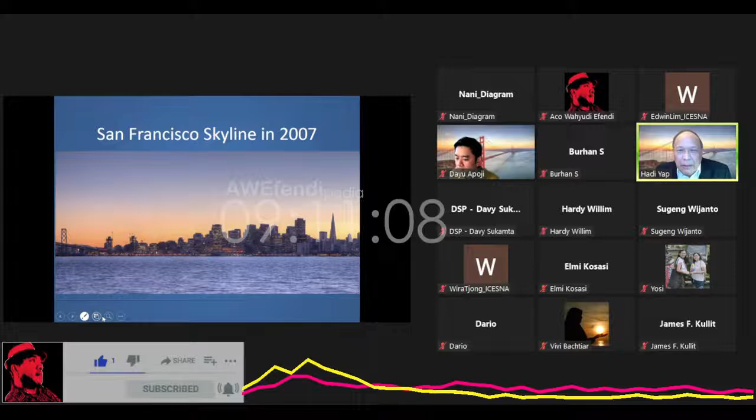Okay, during the past 2 decades or so, we see the skyline of San Francisco has been changing. This is the skyline that we saw in 2007. Fast forward to 2021, you can see there are so many more high-rise buildings in San Francisco. Most of these buildings are on the south side of the Market Street, which divides the San Francisco downtown into two.

The companies that I've been affiliated with, namely Treadwell and Rollo and lately Langan Engineering, were blessed with the trust of our developer clients. They have been the geotechnical engineers for most of these buildings. So because of that, I've been practically involved in practically all of these deep excavation projects in San Francisco.

So in this webinar, we will talk about 4 different systems. One is soldier piles and lagging. The second one is soil nailing. The third one is soil cement mixed walls, or deep soil mixing, DSM. And the last one is concrete diaphragm walls.

The general design considerations that govern the design of the shoring system include looking at the base stability for clay, bottom heave for sand, looking at the structural consideration, failure conditions, and construction-induced ground motion.

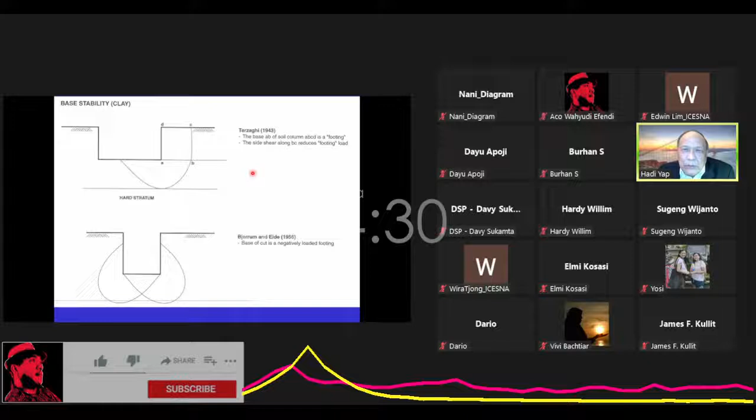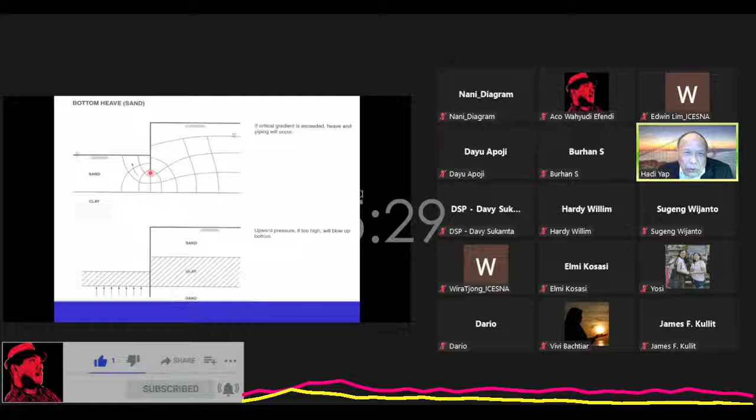When we have sand and there is a groundwater table, and you make an excavation here, you will see that there will be seepage coming toward the ground, coming toward the excavation. So you can draw a seepage diagram that looks like this. And because of the difference in water table, or difference in water pressure head, there is a tendency for this column of soil here, immediately adjacent to the excavation, to kind of want to move upward.

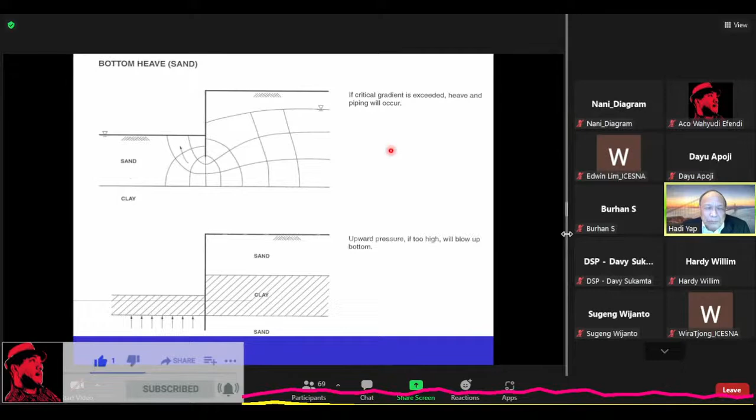So that happens when the confining stress, effective confining stress within this soil column, becomes zero. So this column of soil becomes unstable, and that is a phenomenon that we sometimes call boiling or piping. So boiling and piping is practically a kind of static liquefaction, because liquefaction is also a case where you have your effective stress in the soil equal to zero.

Now look at the other situation where you have a clay layer like this. Seepage cannot occur readily because of the impervious nature of the clay. But beneath this clay layer within the excavation, you have an upward pressure that wants to uplift this layer of clay. So for that situation, we need to reduce the pressure beneath this layer so that it will not cause upheave or bottom heave condition in the sand layer.

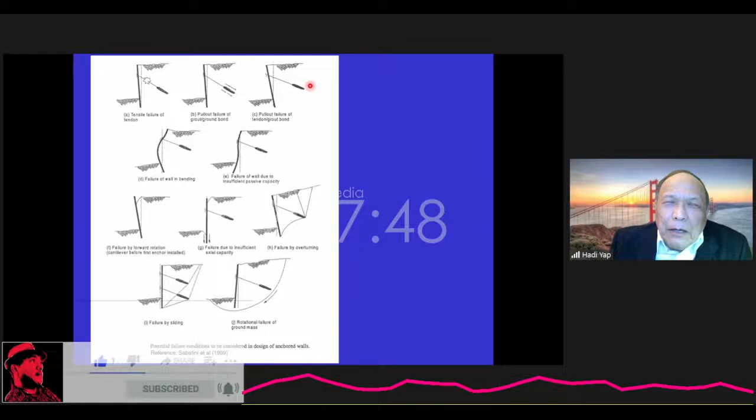This case here is where your skin friction between the grout and the soil is not adequate to resist the tieback pressure, so your wall can also move outward. This is a situation where the skin friction between your tendon and the grout is exceeded by the outward force on the shoring wall, so you also have a kind of slippage condition here.

This situation is where your shoring wall is not strong enough, so you have an excessive bending condition. This situation is where your embedment into the ground is not deep enough, so you have a kind of passive failure here.

This is the initial stage of your excavation where you have not installed your tiebacks yet, so it may cause failure by rotation.

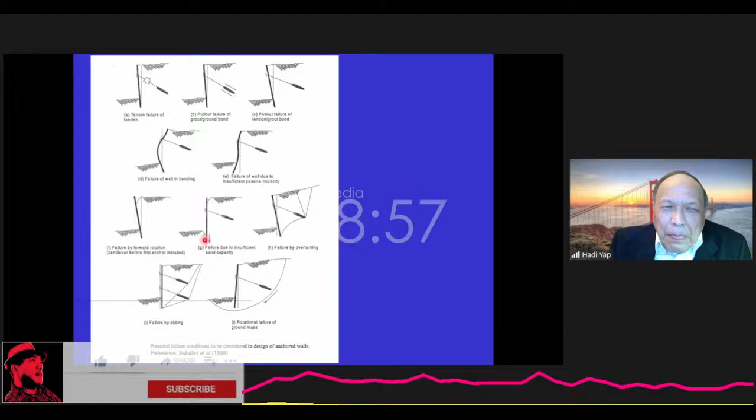This is the situation where your embedment is not deep enough. Remember that this tieback is normally installed at an angle of 15 to 20 degrees, so there is a vertical component of the tieback force that needs to be resisted by this embedment, the skin friction of the embedded portion, and the soil around it. To remedy this situation, you need to deepen the embedment depth.

This is the situation where the bond section of the tieback is not far enough. You might have this kind of overturning, like a block failure, but overturning kind of a thing.

This case is similar to this and also similar to this. This is called a rotational failure, a mass stability problem.

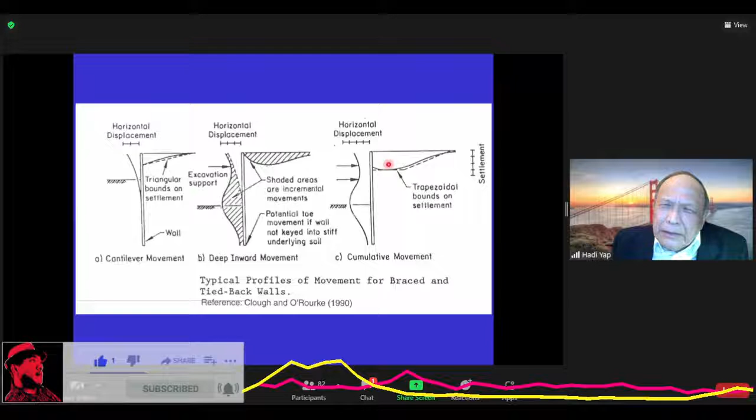This deflection is roughly equal to that settlement. According to the statistics, this is about 75% of that value. So the average ground settlement outside the excavation is about 0.15% of the excavation height. For a 20-meter excavation, the ground settlement outside, if you do a good job designing and constructing the wall, may be around 3 centimeters.

3 centimeters is about 1.25 inches, something like that. The reason this is important is that you might have adjacent buildings that are maybe old, maybe brick, maybe unreinforced, outside your excavation, and they are sensitive to differential settlement. So you want to try to maintain the ground settlement outside your excavation as small as possible to reduce the potential for damage to that old building.

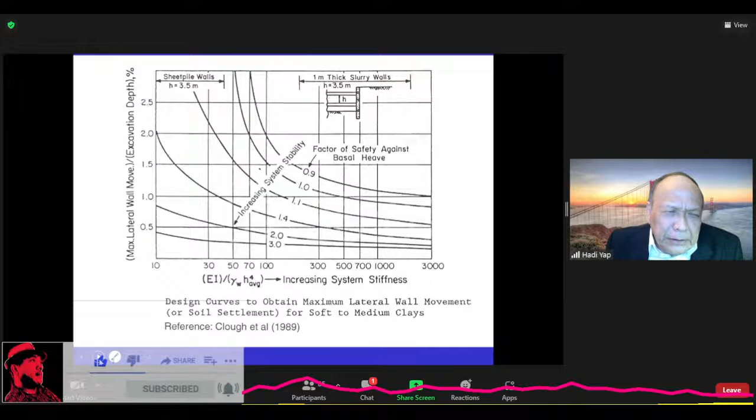Now let's look at other factors that may need to be considered in design of shoring systems in the San Francisco Bay Area. Actually, this isn't just San Francisco - I think everywhere, Indonesia or elsewhere, the same problems may apply to deep excavation because some are common to all. For example, you have adjacent old buildings, some with basements - that's something you need to consider in your shoring system design.

You may have random fill on your site. What's the problem with random fill? The problem is that it may not give you adequate skin friction for your tiebacks, for example. High groundwater level is an issue you have to deal with, because you don't want a problem with piping, boiling, or basal heave in your excavation, as we've talked about earlier. You may have a soft clay problem - soft clay causes base instability.

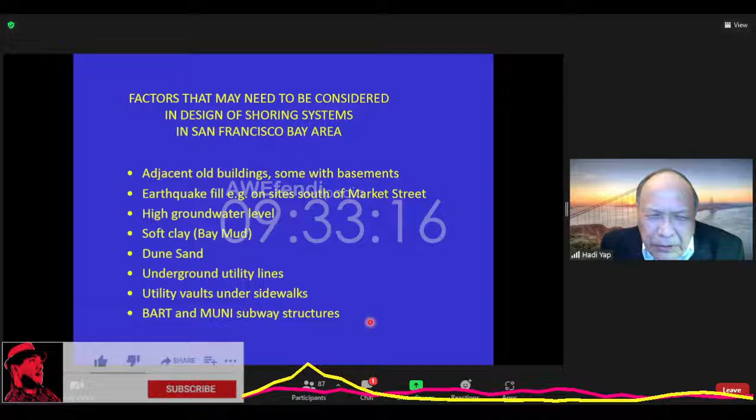You may have utility vaults under your sidewalk, electrical vaults or something else you have to be mindful of. And in another case, you may have subway structures. We have BART, the San Francisco Bay Area Rapid Transit System, similar to MTR or MRT in Indonesia, Singapore, and Hong Kong. We have to make sure our shoring design does not impact this subway structure.

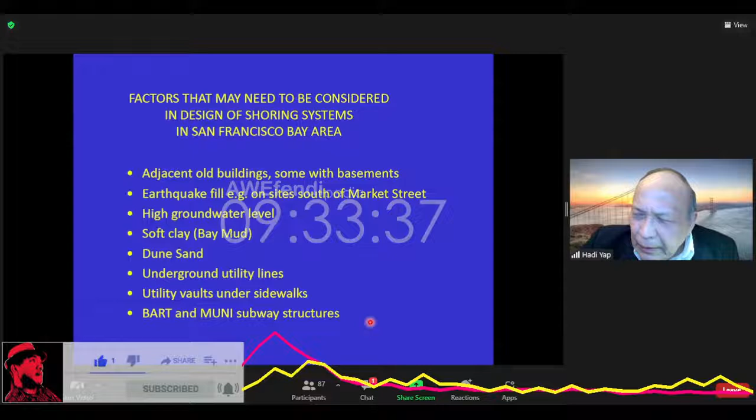Let me show you a map here. This is Market Street in San Francisco. There is a subway structure underneath Market Street, one for Muni. This is the cross section, AA. These two tunnels belong to Muni, the municipal electric train system that, in the rest of the city, runs at street level, but within Market Street goes below street level, on top of the BART tunnels.

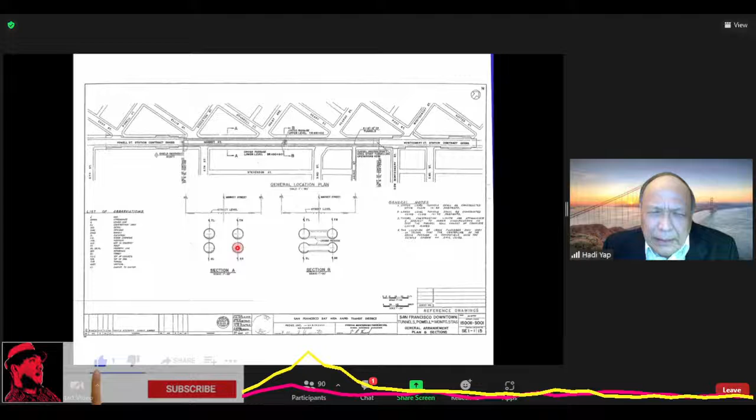BART is the Bay Area Rapid Transit System, similar to MTR and MRT, connecting cities like San Francisco, East Bay including Oakland, Pittsburg, Concord, Walnut Creek, and South Bay, including South San Francisco and the Millbrae station. So once in a while you have this connecting tube between these two tunnels.

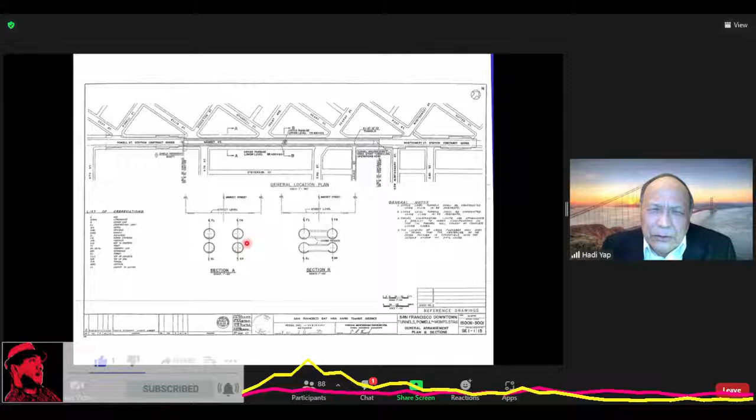And every few hundred yards or so, you have a terminal station, a subway station, where people can go down and board these BART tunnels or Muni tunnels.

But sometimes these tunnels not only go under the street, they may go under your site. I have one or two slides to show you later on. But if you take a cross section here at your typical site, for example in San Francisco, you may have a situation depicted in this diagram.

So this is a site where you have a tunnel, and this is your building, located on Market Street. If you take a cross section like this, this is your Muni line, this is your BART line, and this is your building.

So if you want to develop this site, demolish this building, and build a multi-story high-rise structure, you may excavate deeper and install new shoring walls. All of that construction is governed by a set of guidelines established by BART authorities.

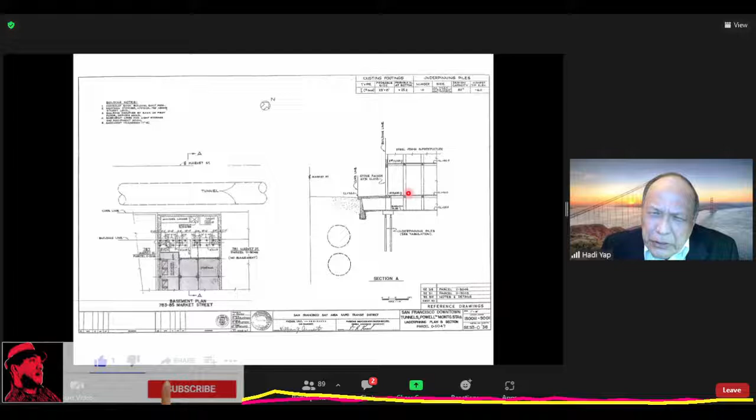We are fortunate to have a lot of experience in this kind of situation. We've probably done between 10 and 20 developments adjacent to Muni and BART lines, and one of our case histories that I'm going to show later today will illustrate that situation.

This is one of my project sites in San Francisco. This is Market Street that I showed you before, and this is South Van Ness. The site is called 10 South Van Ness. This is a triangular site.

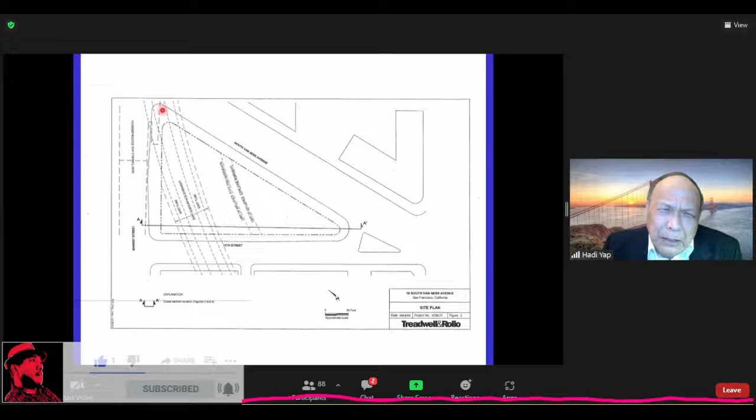As I showed earlier, there are two Muni tubes on top of the BART tubes. The Muni tubes go upward and appear at street level on Market Street, but the BART tubes remain at the same elevation and go underneath my site.

So if I take a cross section AA prime, I can show you this situation: the two BART tunnels or tubes that go under my site. From here to here we're going to have a podium, from here to here a tower, and here to here a mid-rise. So you have this situation where you're going to build on top of a BART tunnel. There are a lot of guidelines, and your design will be reviewed by BART.

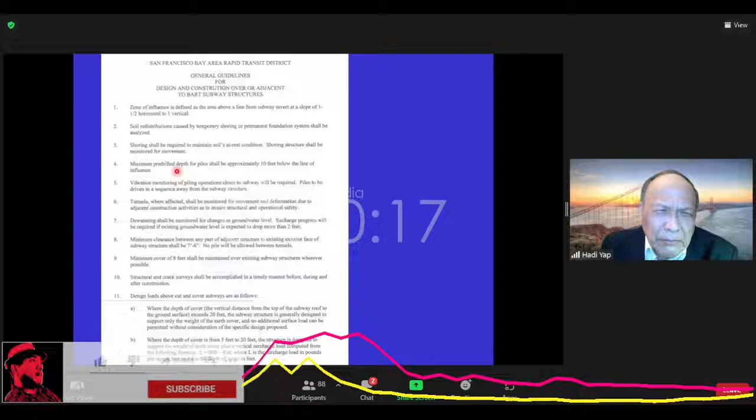Number 3, shoring shall be required to maintain soil at rest condition. In soil mechanics, we have active, at rest, and passive. They're going to want you to design your shoring under at rest condition, which is slightly higher than your active pressure. Number 4, if you're within the influence zone, you have to pre-drill. If you're going to use driven piles, you have to pre-drill below the influence zone. I'll show you what the influence zone is later on.

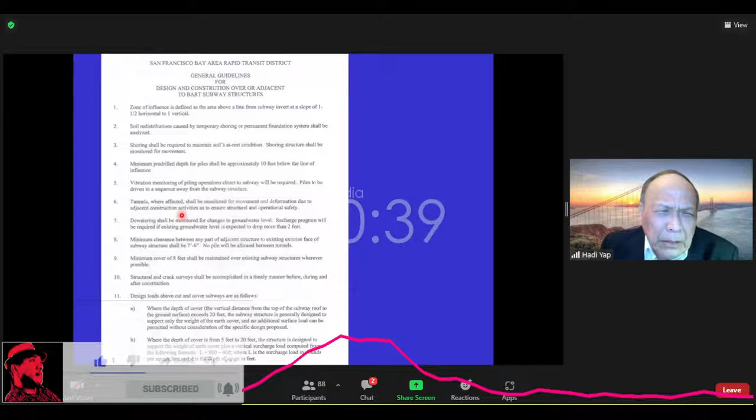Number 5, if you are going to do a piling operation, you have to monitor the vibration close to the subway. The tunnels have to also be monitored for vibration and movement. The water level cannot be lowered. They have to monitor and make sure it's not lowered more than 2 feet below the pre-existing water level. And you cannot build your structure closer than 7'6" to their BART structure.

7'6" is about 2.3 meters maybe. I'm going to skip this and show the next slide. We have a lot to cover.

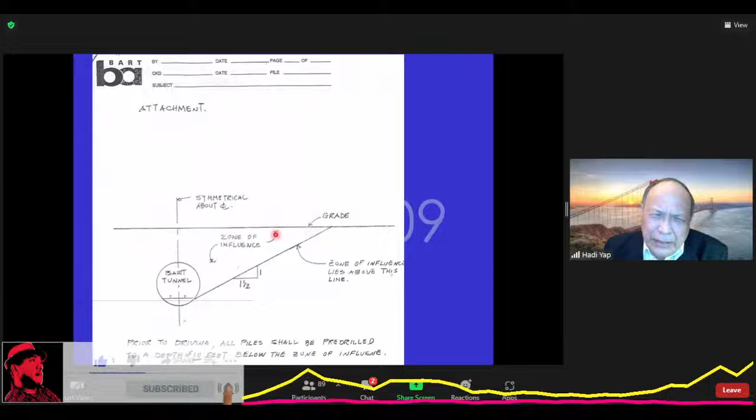So if you use bored piles, you have to use double casing in this depth, in this zone. Double casing eliminates any friction within the zone of influence, because if you have skin friction here, your load can be induced to this BART tunnel, and they don't want that to happen. So you have to have double casing in this situation.

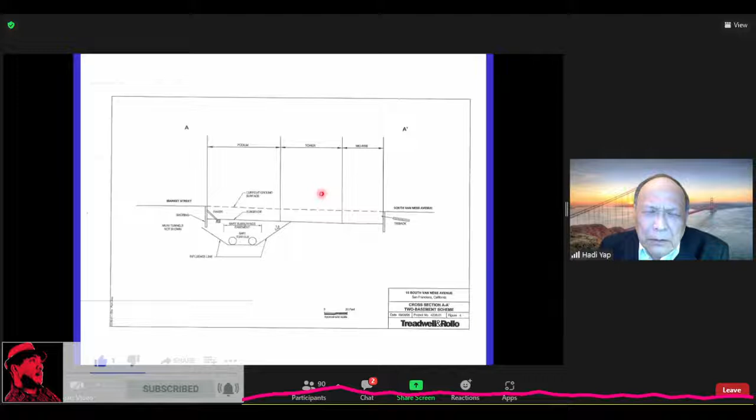Within this zone, we have to use double casing piers because they don't want to have any loads induced to these tunnels. So that will be their requirement. All right, it works, okay.

I have 4 case histories that I'm going to show. We have about 30 minutes to go, so I'll try to make this 7 to 8 minutes for each case history. Number 1 is what is called the Bridgeview Condominium.

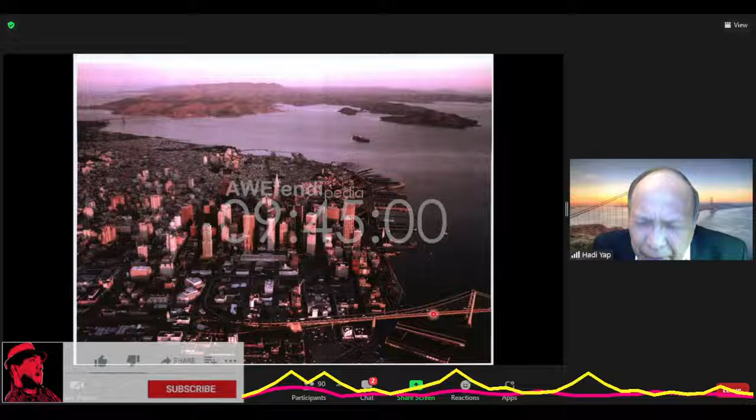We have a developer that wants to build a condominium on the north side of this Bay Bridge Anchorage. This is the Bay Bridge Anchorage. The Bay Bridge connects San Francisco and Oakland in the East Bay, and it is traveled by about 260,000 vehicles a day. So Caltrans, who is in charge of this, is very thorough in the review of our design, because any deformation problem with the Bay Bridge anchorage would be a nightmare, since this bridge is so well traveled. Can you imagine 260,000 vehicles a day?

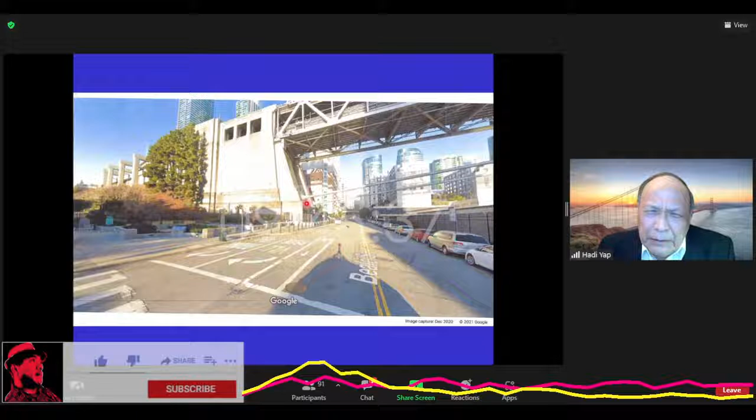So this is the project site, located on Beale Street. This is looking north, so this is the Bay Bridge anchorage looking from the south side. The project is located on the north side, here. This building is about 16 to 18 stories tall, but it's only 20 feet away from the Bay Bridge. So you can imagine people are feeling very concerned, and you can see that the name of this condominium is Bridgeview, because it's so close to the bridge, they may as well call it Bridgeview Condominium.

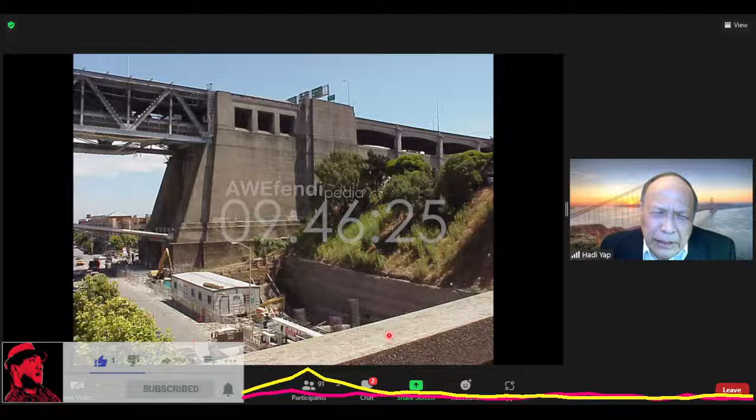So we were able to look at the construction drawings, and this Bay Bridge anchorage was founded in bedrock, called sandstone. You can see that if you blow this up, the date is probably 1933 or 1934, during construction of the Bay Bridge. So we drilled a bunch of borings. This is the Bay Bridge anchorage, this is our site, and it's like 20 feet away.

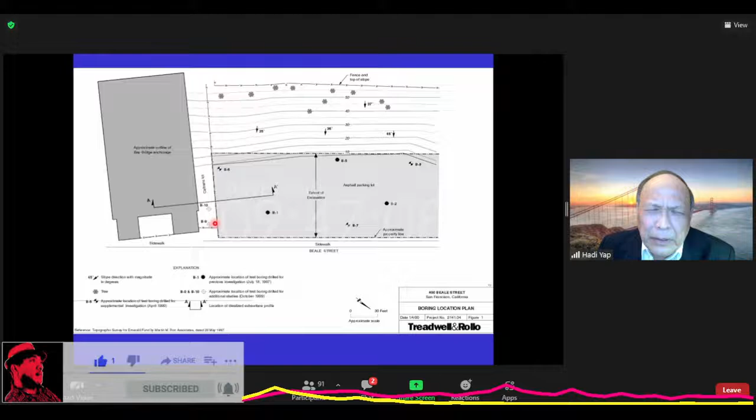We take a cross-section through here. This is the subsurface condition, which consists of fill that was placed after the excavation of the Bay Bridge anchorage. And here we have bedrock, which we call shale and sandstone. You'll notice here the elevation is minus 21.67 feet.

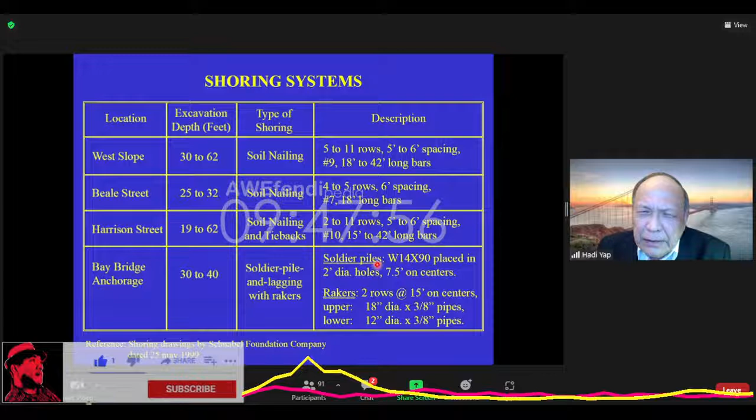This is the shoring plans. By the Bay Bridge anchorage, the excavation will be 30 to 40 feet, and we're planning to use soldier pile and lagging with rakers. The soldier pile is a wide flange W14 placed in 2 feet diameter holes at 7.5 feet on centers. And the rakers, there are 2 rows of rakers. One is 18 inches in diameter, and the other one is 12 inches in diameter.

So this is the step of the construction. This is 20 feet away, and this excavation will go down to minus 27.5 feet. So the excavation will be about 6 feet below this bottom. And this is about 20 feet. So if you take the inclination of this, that will be 6 divided by 20, which is 30%, or 0.3.

And the excavation will be in this manner. First, you want to install this soldier pile, and then you excavate to this level, and then you install the lagging, this wood lagging. And then you excavate to this level dash line. You install these wales and these rakers, that big 18-inch pipe. And then you excavate to this level. And then you install wales and rakers. And then lastly, you excavate to this level.

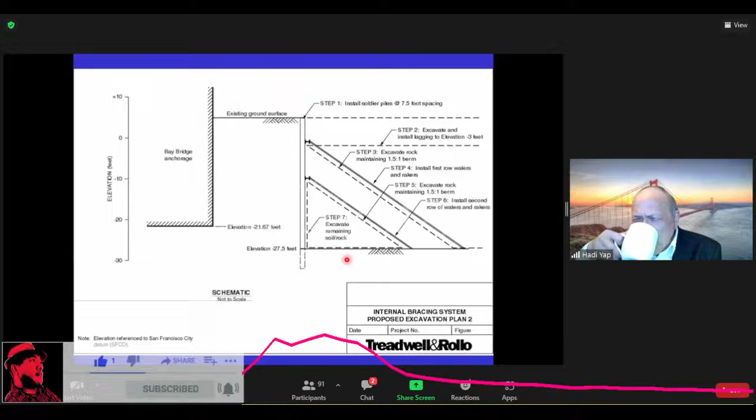However, looking from the point of view of Caltrans, the California Department of Transportation, which has the authority to approve or disapprove your plans, it's not as simple as that, because the person in charge said this to me: that the Bay Bridge is a very important infrastructure or roadway. And if something is wrong with the anchorage, some large movement, the Bay Bridge has to be closed for safety of the travelers, and he doesn't want to be the person who stopped and closed the Bay Bridge, which I understand his point of view. So how do we prove that this excavation will be stable?

I find no simple solution or closed form solution available, so we look at the finite element method. This was in the old days, about 1998, I think, for this project, so about 20 years ago. We seldom used Plaxis, but Plaxis already existed, so we used Plaxis.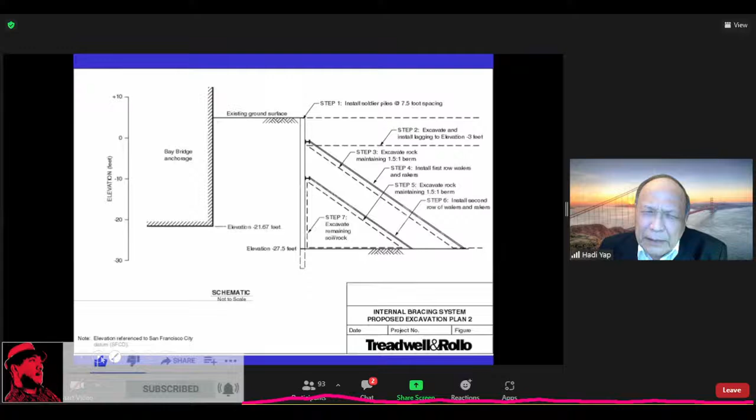So from this we gather that you can have about 0.1 inch of movement here, but for the structure, based on this number, you have very little movement. That movement is tabulated next. You see, we saw that the movement is less than 1/100th of an inch, 0.01 inch, which is less than 1 millimeter. And under seismic condition, using a seismic coefficient of 0.2, we still have less than 0.1 inch. 0.1 inch is about 2 millimeters of movement.

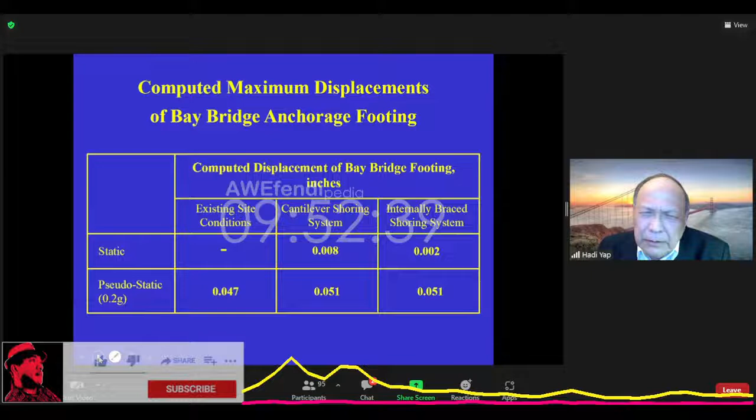So with that, Caltrans approved our plans, and we constructed it. This is the construction of the soil nailing system that was used for 3 sites, not for the site where we used soldier pile and lagging. What is a soil nailing system?

Soil nailing system is, as shown in this schematic diagram, basically rebars or tendons that you place in pre-drilled holes. These pre-drilled holes are spaced at about 5 to 6 feet on centers, and then grouted. And then over here, you have this shotcrete facing that is reinforced with wire mesh.

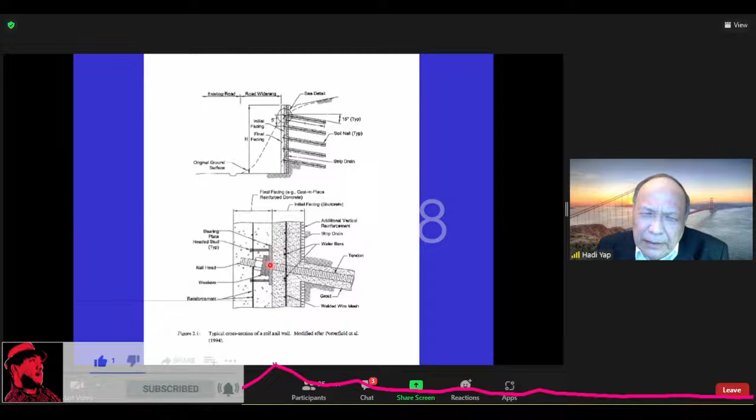If you have a permanent soil nailing wall, you have another layer here, and for that you have to have studs, shear studs. But in this case, if you have just a temporary shoring, you don't have to have a shear stud, so you just put a plate and a nut to install this wall. And you do that in stages.

First, you make a cut about 3 to 5 feet, install your first row of nails, and then you shotcrete the face. You go another level, do the same thing, and repeat it until you go to the bottom of the wall. And this soil nailing system...

It was invented around the 1970s. And the first project with this soil nailing wall system used in Indonesia was in the early 1990s. I think it's the project called Gedung GKBI. Gedung GKBI is located at Bendungan Hilir, near Jembatan Semanggi. So that is the system that was used first in Indonesia on a major project.

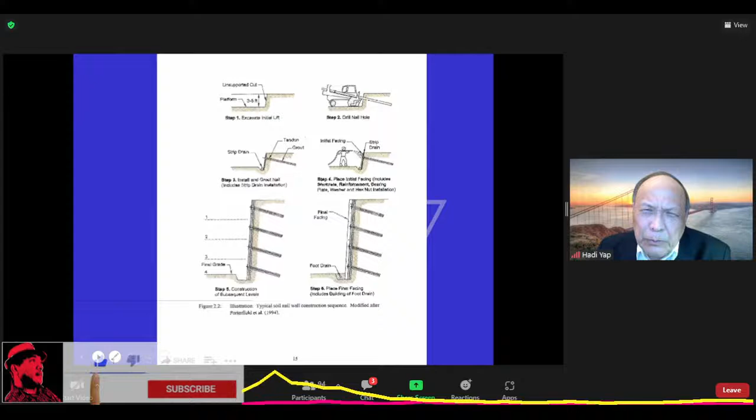This is the site adjacent to the Bay Bridge anchorage. This is step 2 or 3. This is the walers that we saw before, and this is a step where the rakers have been installed. This is the first row anchors, and this is a situation where the wall is completed. This is the second row anchors, the second row rakers rather, not anchors. Rakers are inclined support, internal bracing, inclined internal bracing. So this project has been completed successfully, no movement detected, so everybody was happy.

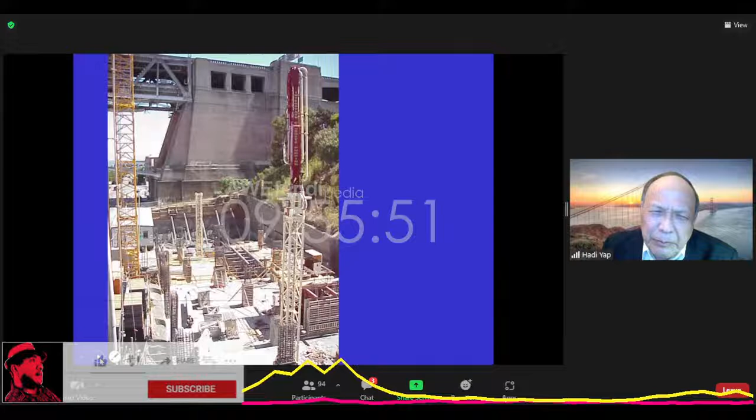The second project that we're going to discuss is the Century, which is a deep soil cement mixed wall. Maximum depth of excavation is 54 feet. It's located in this area here.

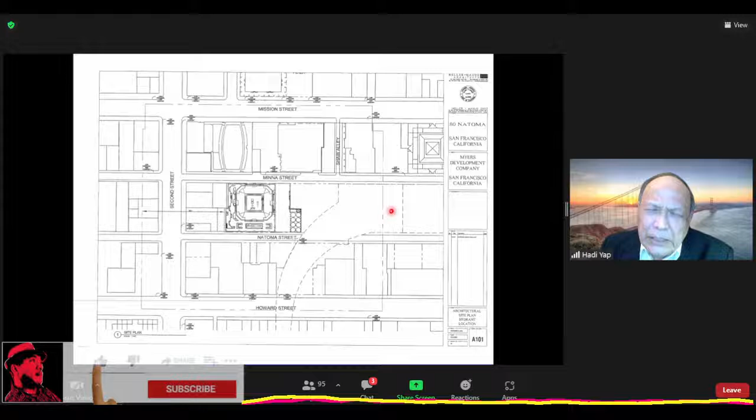This is the project site plan view. This is 2nd Street between Minna and Natoma Street. This is the future, at that time, of the future high-speed rail below ground.

I've been working on this project for maybe 20 years or so. Until now, it's not completed yet. That's what happens - sometimes you work 10, 20 years and it never happens.

So this building is going to be 45 stories tall. It has a 2-story basement. However, the original plan was to have a 3-story basement on a mat foundation. This is the bottom of the basement, about 54 feet. The bottom of the excavation was going to be supported on the mat foundation.

The soil conditions consist of fill, dune sand. Marsh deposit is basically medium to stiff clay, and then you have dense sand here. Groundwater table is pretty high. So because of the high groundwater level, we were using what we call a deep soil cement mixing system, DSM, or soil cement mix wall.

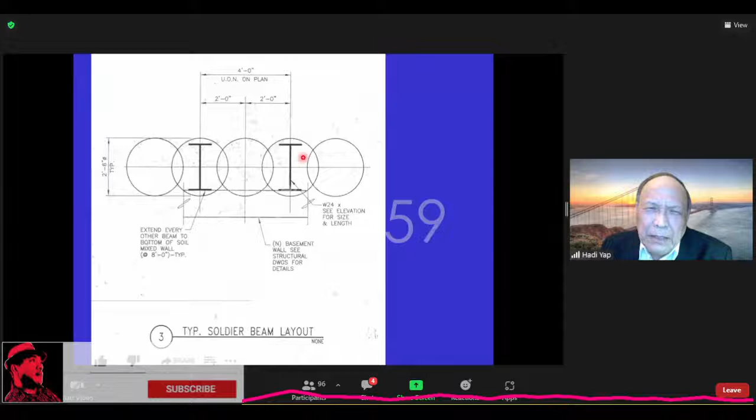So it's constructed using a multi-axis drill system, and at alternate locations, steel beams were placed into the ground. So let me go back here.

Initially, this was going to be the first top-down construction done in San Francisco. I don't know how many top-down constructions have been done in Jakarta - I think there have been 1 or 2, I'm not too sure. So basically, we do not use tiebacks, we do not use internal bracing, but rather we use the building slabs as the internal bracing.

So what we do is install the shoring walls first, and then install king piles or king posts to support the slabs during construction. Then we install the street level slab, and excavate with a small excavator below to come to basement slab number 1. We cast basement slab number 1, then go down another level. We cast basement level slab number 2, and so on until we come to this level, where we cast the basement wall and the mat foundation. So that is top-down construction, which to date has not been used in San Francisco.

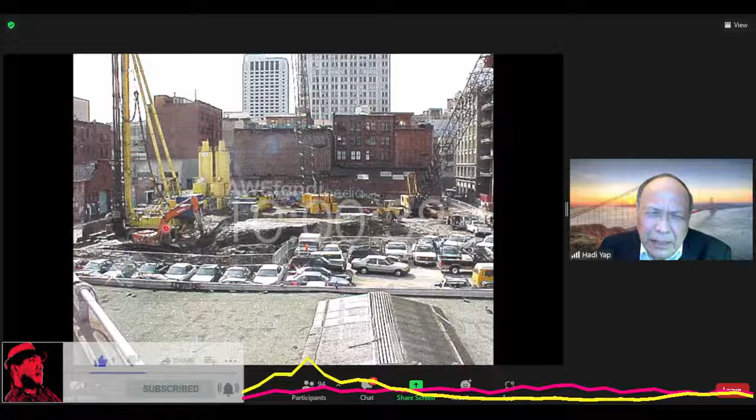Because of that, we cannot use tiebacks, since you have adjacent buildings not too far from your site, and they would not like you to install tiebacks beneath their properties because these tiebacks may present a hindrance, an obstruction to their future development of the site. So go back to the construction. This is multi-level - you can see this is a triple axis drill pier, drilling equipment. It was done, at that time, by a Japanese company called Seiko, exactly the name as your watch, Seiko, S-E-I-K-O. So looking at the closer view, this is the triple axis.

So basically, they advance these augers down into the ground, and at the same time they inject and mix the soil in situ - in situ meaning in place - with cement bentonite slurry. Because of that, the soil and cement form a stronger soil. The specification requires that the 28-day strength of these specimens recovered from the mixture is 200 psi, pounds per square inch. Also, because this wall is impervious, we recover samples and test them for permeability. The permeability should be less than 10 to the power of -6 centimeters per second, which is more like the permeability of clay. So we did that, and the cylindrical strength and permeability of the samples recovered from the ground were fine.

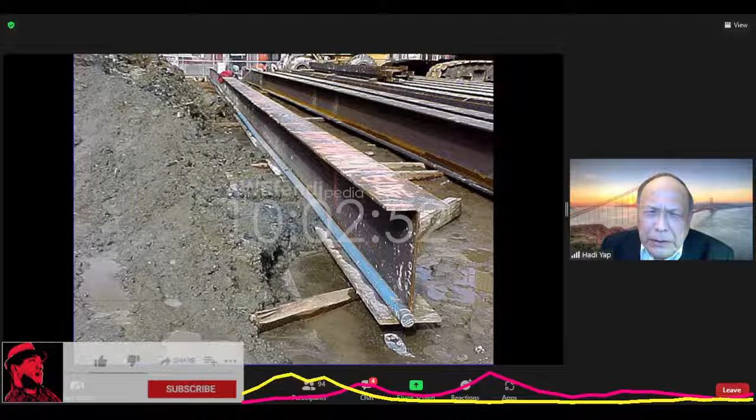During construction, we also want to monitor the movement. So instead of installing inclinometers in pre-drilled holes, we attach the inclinometer to the beams and just lower it into the ground. This is the process of lowering the steel beams into the ground. If you lower these steel beams soon after the drill holes are completed, it will be easy—it will just drop by itself by its own gravity. So this is the final condition.

As I showed earlier, these are the steel beams spaced about 4 feet apart. So the shoring walls were completed.

However, the TJPA, the Transbay Joint Powers Authority, which has authority over the high-speed rail system, realigned the alignment of the railway such that it intrudes on our site. Because of that, apparently we cannot coexist, so they acquired this land from the developer, and the developer cannot develop it any further.

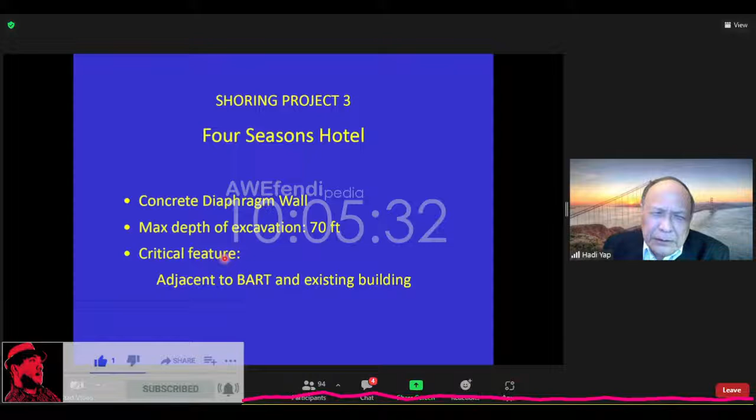The critical feature of this project is that it's adjacent to BART and existing building. This is a view of the project—of course this is a model. This is the Four Seasons Hotel in the model. If you walk from this side you can see what it looks like—this is Geary Street, I believe, and this is the Four Seasons Hotel and Tower, a 36-story building with, I believe, 4 or 5 levels of basement.

It's adjacent to this 6-story brick building, adjacent to the Marriott Hotel, and adjacent to a 2-story brick building behind this. So there are a lot of buildings, and it's also adjacent to BART and Muni lines underneath Market Street—very crowded.

So this is the site. This is Market Street, and this is the Marriott Hotel. This is the footprint of the tower, but the footprint of the basement goes all the way to the property line. Here you have what we call 735 Market Street, a 6-story brick building, and here there's an abandoned 2-story electrical substation building.

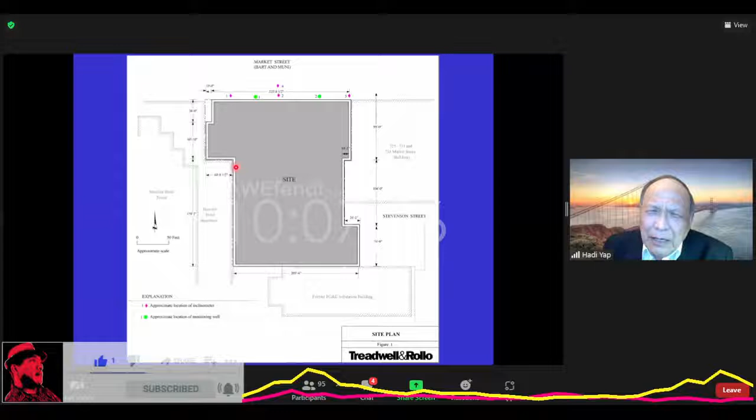Because of this situation, we can use tiebacks in most places below the basement. But over here, BART—the Bay Area Rapid Transit—will not allow tiebacks because they have tunnels there. So here we have to use internal bracing, diagonally oriented like this. So part of the retaining system is tiebacks, and part is internal bracing—it's a mixed bag.

So this is the soil condition: we have fill, dune sand, marsh deposit, clayey sand, silty sand, old bay clay, silty sand, and probably alluvial deposit below that. The excavation is 70 feet, right on top of that layer.

So the building, as I said, is a 36-story building. It weighs about 7,000 pounds per square foot, roughly, and the soil excavated is about the same, roughly 7,000 to 8,000 pounds per square foot. So this is like a compensated foundation—you don't need any piles, but you need a mat because you'll have some differential settlement within your foundation.

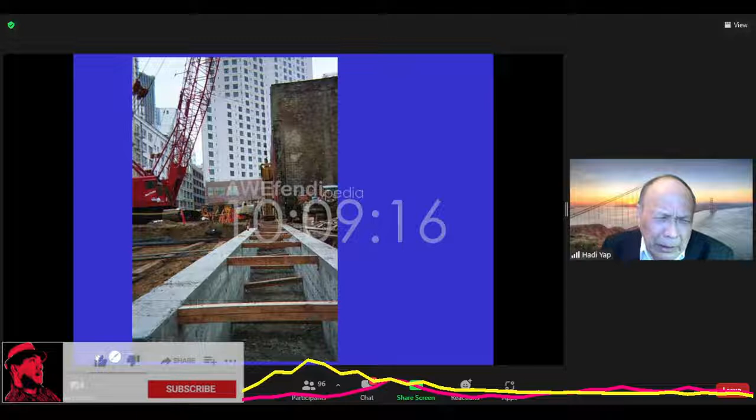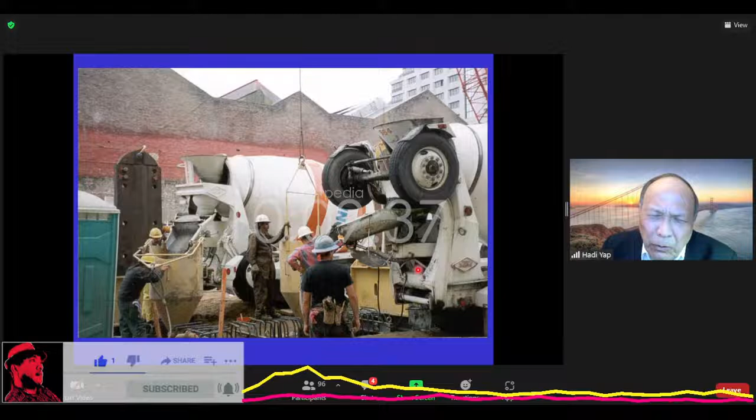As I mentioned, we're going to use a concrete diaphragm wall. Before installing it, you have to install guide walls, then use a clamshell to dig the soil. Then you put in the rebars—these are end plates—and then you cast the concrete. The excavation is kept stable using bentonite, a mixture of bentonite and water. This shows the concrete being poured.

This is looking south. This is the 2-story electrical substation that has been abandoned, and this is the 6 to 7-story brick building on the east side of the project site. This is looking south, as I said—you can see we use tiebacks wherever we can, but on the side facing Market Street you cannot use tiebacks. You have to use these diagonals, internal bracing. This is one side of the facing along Market Street, which runs in this direction.

So the internal bracing has these diagonals, cross-lot bracing kind of thing. But here we have another layer, another row of rakers, as I'll show later. This is Market Street, where BART tubes are underneath it. This is the 7-story building, and this is the Marriott Hotel next to it.

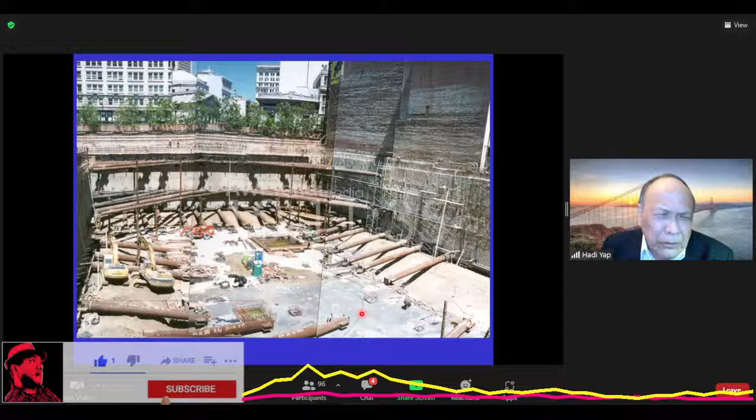So we have this - these are the diagonals for the first row of internal bracing. This is diagonals, second row of internal bracing. And these are your rakers kicking into your mat. So the mat foundation was partially cast first, and then you use the mat to kick into the ground. Let me show you a little more - this is the situation for the third row of rakers of the foundation.

So we have an inclinometer here, and also another one here, so we're going to look at number 2 and number 4. In number 2, you can see this movement here - this is the mat. So the movement here is about maximum. The lateral deflection is about maximum, about 0.8 inches, about 2 centimeters.

However, there's something fishy going on here. I think what happened is that this wall is not extended to the ground surface because of the vault underneath it - so the wall stops here. So this has nothing to do with the movement of ground, but rather because of the void space kind of thing. So this movement is only 0.8 inches, and that happens to be about 0.1% of the excavation height. So that's pretty good - everybody was happy with this.

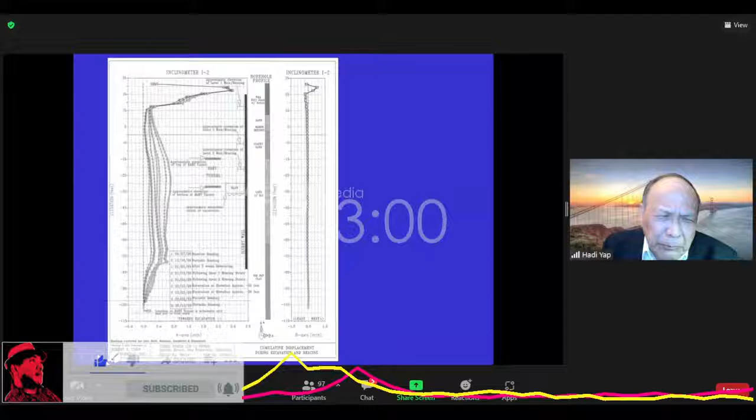If you look at inclinometer number 4, which is farther away, about 15-20 feet away from number 2, the movement is even smaller - it's about 0.4 inches, about 1 centimeter.

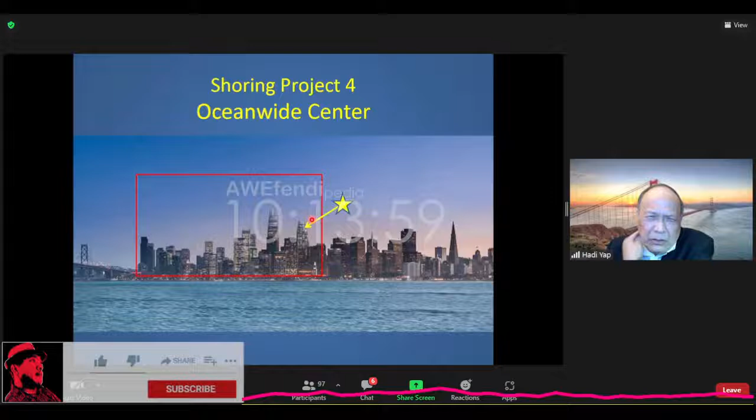So this is project number 4, Oceanwide Center. This is the building that was going to be Oceanwide Center. Fortunately for me, my colleagues have prepared these slides for an internal presentation within the company - my colleagues Justin Ray, Scott Walker, and Laurie Simpson have allowed me to use their slides for this presentation. This was going to be the second, one of the tallest buildings in San Francisco.

Let me show you the plan. So there are two towers - this is the green tower, and this is the purple tower. The green tower is going to be 910 feet tall, and the purple tower is going to be 630 feet tall. There are going to be 3 to 4 basement levels. Excavation will be 65 to 72 feet deep, and the foundation consists of large diameter drilled shafts or bored piles extending to bedrock. Now, the critical nature of this project is this.

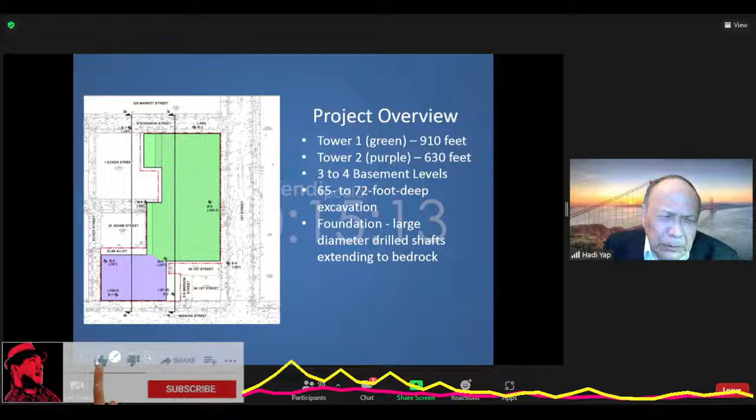Across Stevenson Street, we have this 525 Market Street building that is 40 stories, and they are supported on shallow piles - not very deep piles. We also have an 18-story building here, what we call 20 Jessie Street, 240 feet tall, also on short piles - maybe a better word is short piles, not shallow piles. We have 2 adjacent buildings here, 1 Ecker, and this one here, a 6-story brick building on shallow foundation. So we have a 6-story building on shallow foundation, an 18-story building on short piles, and a 40-story building on short piles. That's very challenging, very challenging.

So if you look at this cross section through here, this is what it looks like. You have this 18-story building - don't pay attention to this, I think it's a typo, it's only an 18-story building, Jessie Street. So the piles are terminated above the future bottom of the excavation, so we have to design the shoring wall for the surcharge pressure coming from this building load. But that's very typical of what we have to do.

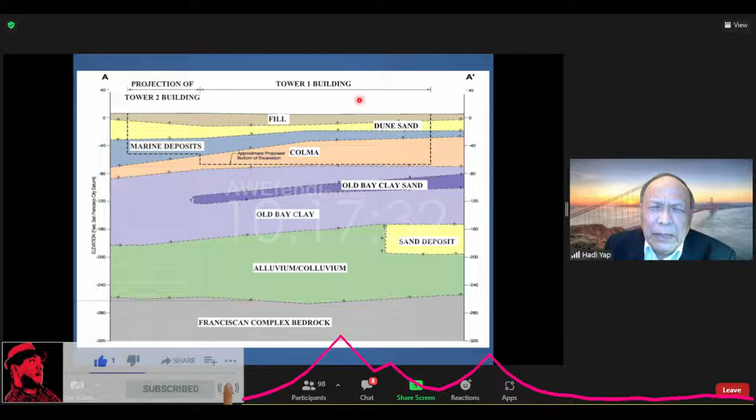This is the soil condition - you have fill, dune sand, marine deposit, Colma, Old Bay Clay, sand deposit, alluvium, and bedrock. So this is the line of the excavation. This is the shorter building, 630 feet, the Tower 2 building. This is the taller building, 910 feet, and these are the piles.

Before we do the excavation, we install 101 drilled shafts or bored piles. Diameter is 6.5 feet or 2 meters. They are socketed 5 to 50 feet into the bedrock.

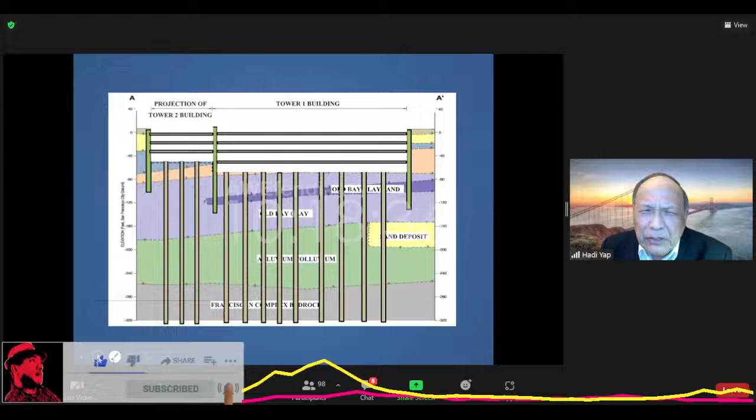So the excavation will be 4 basement levels, and will be 3 basement levels. So this is the internal bracing that we have to use because there are so many adjacent buildings, and also you need very rigid internal bracing to reduce deformation, excavation, or deflections.

So this is the plan view of the shoring system. These are the diagonals, these are the cross lot bracing, made of pipes, and this is maybe 36 inches in diameter, which is about 90 centimeters. And this is 42 inches, about 105 centimeters, 1 meter 5 centi.

So you can see here, you have collars. The purpose of the collars is to allow you to preload, to jack this pipe, because you don't want the deformation. So you want to preload this wall. That's the purpose of the collars.

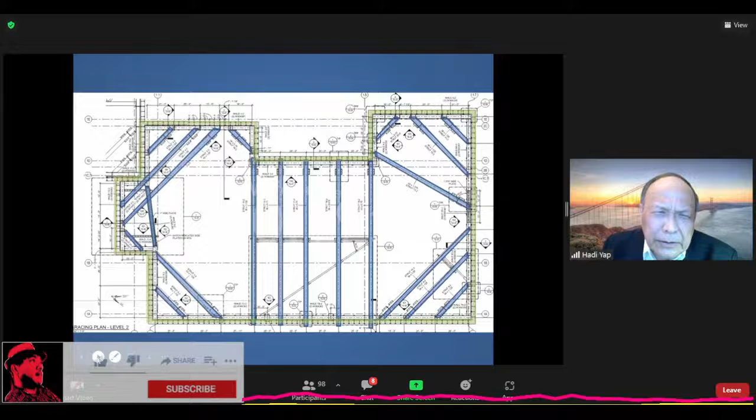So this is the issue we have. We have 2 issues. One is that you have these sand lenses that may blow up this excavation, called basal heave for sand. Another problem is that we have basal heave for clay.

And this 525 Market Tower, of course, they have the geotechnical consultant. So we have to please them to make sure that our shoring will not cause any harm to their building. So we have to do a calculation and stuff.

However, looking at this picture showing the blowout of piping because of this pressure here, to reduce the tendency for this clay layer to blow out, we have to use a depressurization pump. So we have to drill wells, pumping wells, and dewater the pressure here so that it will not cause any blowout.

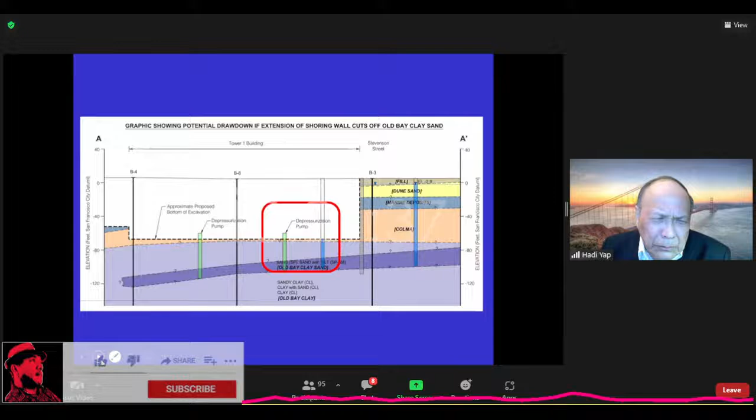But what about this basal heave problem? Based on this chart by Terzaghi, Peck, and Mesri, for the situation that we have a factor of safety against blowout of about 1.05, according to Terzaghi, we may have 0.35% deflection or deformation of the ground. So 0.35% is 3 inches.

So our neighbor will not allow this to proceed unless this movement is reduced. So this is deemed unacceptable by the project team. So what do we do?

Well, in this case, we do something we have never done in San Francisco, which is to use buttress walls. This is the excavation part close to 525 Market Street. We use these buttress walls, made using the soil mix wall method. So basically we create a wall that is hard, with a compressive strength of about 200 psi, to buttress this wall.

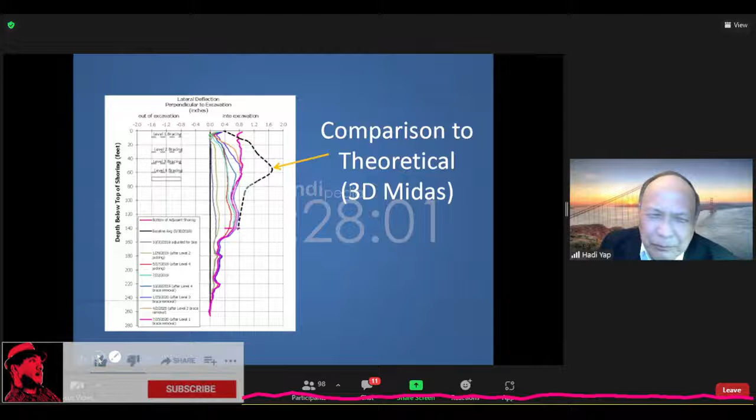Kemudian mungkin ada yang tanya, bagaimana bangunannya, udah selesai? Well, kalau basement udah selesai, tapi ini kan Ocean Wide, apakah kalian tahu Ocean Wide itu dibangun oleh Oceanwide dari China. Oceanwide sekarang lagi mengalami masalah keuangan di mana-mana, sehingga proyek ini sekarang tidak dilanjutkan dan akan mencari pembeli. Jadi itu sekian saya punya presentasi.

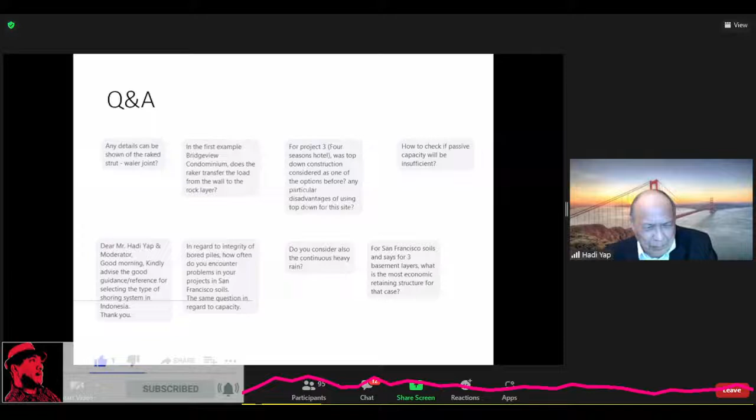Ya, ini beberapa yang sempat saya capture, tapi ada lagi terusannya, cuman kita bisa bahas satu-satu. Yang ini cukup teoretikal, mungkin kita bisa mulai dari sini Pak Hadi: how to check if passive capacity will be insufficient. Itu harus dilakukan, desainernya harus begini. Jadi kita di San Francisco, Geotechnical Consultant akan memberikan design pressure dari dinding ini dan passive pressure, biasanya allowable passive pressure. Dan itu harus dicek oleh desainer setelah dia memasukkan resistance daripada tiebacks atau resistance daripada internal bracing, apakah lateral stability-nya bisa tercapai. Kalau tidak bisa tercapai dengan data-data yang kita rekomendasi, embedment-nya bisa diperdalam sehingga passive resistance bisa menambah yang kekurangan itu. Jadi passive capacity itu akan diberikan oleh Geotechnical Consultant di dalam laporannya.